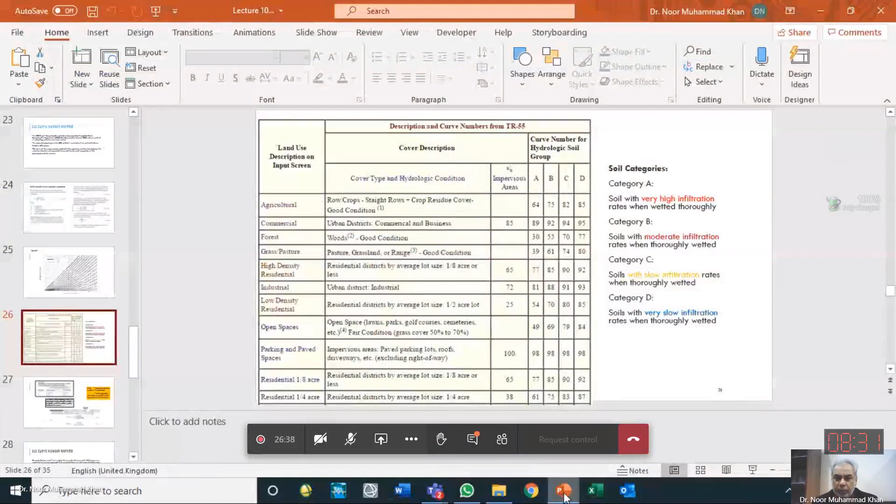So you are seeing that SCS, Soil Conservation Service Department, which is a sub part of US Department of Agriculture, they have given curve numbers, which are a coefficient or a constant, let us say, for different kinds of soil, for different kinds of land uses, and for different kinds of soil types.

For example, for agriculture land use having row crops in it, the curve number they propose varies from 64 to 85 for different soil groups A, B, C, D. So 4 kinds of soil groups they have specified, and they have divided the soil based upon their infiltration capacity.

If you read the definition of the soil categories, category A is the one which has very high infiltration rate, B has moderate infiltration rate, C has slow infiltration rate, and D has very slow infiltration. So they have divided into these four characteristics. If the soil has a very high infiltration rate, then the curve number proposed is 64.

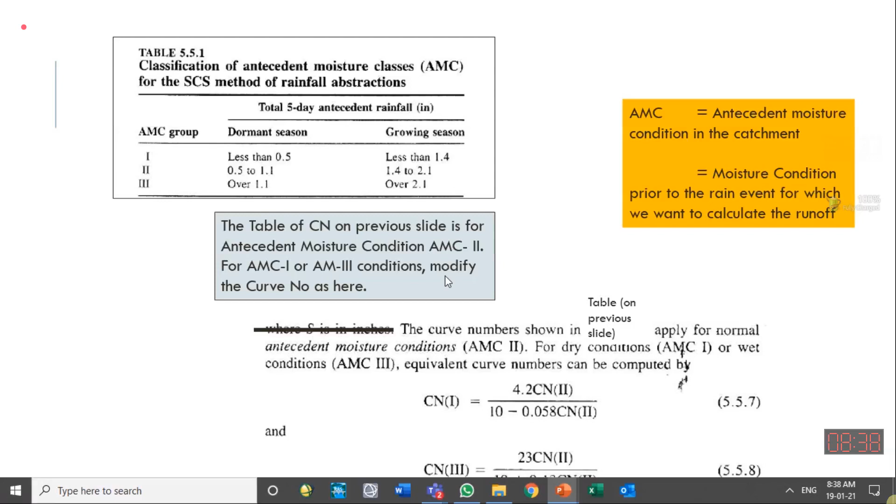That should be taken into account. So if curve number is known to us, this SCS method has given us the relationship between runoff and precipitation and infiltration rate.

IA is initial abstraction, or initial losses. Abstraction means taking out something. We use this word quite often in hydrology. We say groundwater abstraction is so much in Pakistan, meaning groundwater extraction is so much. Abstraction and extraction are similar things. So over here, abstraction means that water which is taken out of the precipitation, and the rest is the runoff. So it means the initial losses which are there.

S is the potential maximum retention in the catchment, the total retention possible in the catchment to fill all the depressions and account for infiltration. That is called S. P is the precipitation for which we want to find the runoff. So they have related runoff, in units of depth of water (inches), equal to P minus IA, initial abstraction, squared, divided by P minus IA plus S.

This initial abstraction, they found from different experiments, can be taken as 20% of the total or maximum retention. So IA can be replaced as 0.2S, and the same equation can be rewritten only in terms of P and S: Q is equal to P minus 0.2S, squared, divided by P plus 0.8S.

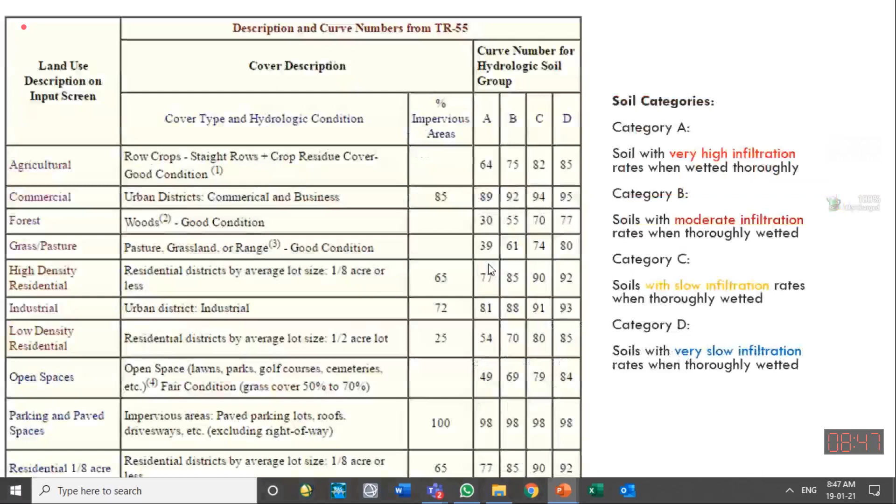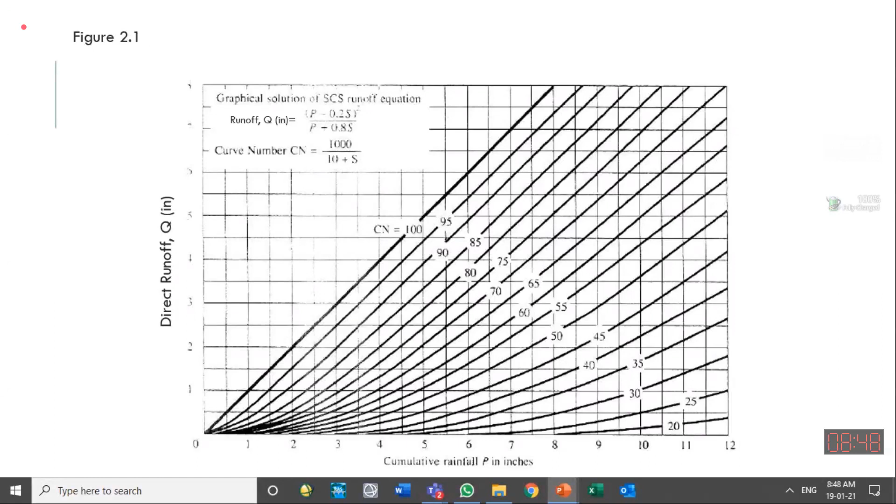So if somebody wants to know the losses, he can find it from this method. If somebody wants to know the runoff, he can estimate it from this method. Hopefully you will be able to use it in a good way. So either you use a graph or you use the equation - you should be knowing both of them. Sometimes we give the graphs to you. Equations are simple.

Q is equal to (P minus 0.2S) squared over (P plus 0.8S). And we know the original equation was relating the initial abstraction and the total retention with the runoff. Initial abstraction was taken as 20% of the storage of the maximum retention, and the curve number and maximum retention are related by 1000 over curve number, minus 10.

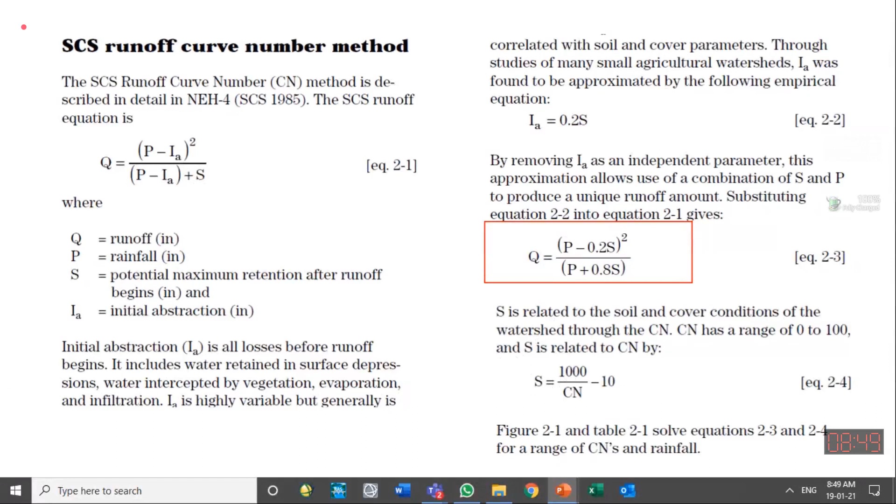So these equations are for inch units - keep in mind, these are for the inch unit. In other literature and books which work in SI, in centimeters, if they are measuring, you will find a slightly different coefficient over there. So this method is available in different places in centimeters and different places in inches. So take care that these equations are good in inches. Any question in this method? This is widely used - people have used it in GIS also.

They give the land type, the file for the land type, land cover, and soil type. Using these three pieces of information, they find the curve number automatically from the computer, because the table is also fed to the computer. So if the curve number is known, the rest is calculation - calculate S, calculate runoff for different kinds of rainfall.

Methods are available which can use this SCS method - Hydrologic Modeling System, HMS. HEC-HMS software has computerized this SCS curve number method to convert rainfall into runoff.

Another method is unit hydrograph. We should know the definition of unit hydrograph and also know how to use it to measure the direct runoff. Unit hydrograph is a direct runoff hydrograph. A hydrograph is a relationship between some flow parameter with time. So if the flow parameter is only the direct runoff, then we say this is a direct runoff hydrograph, so unit hydrograph is a kind of DRO hydrograph, direct runoff hydrograph.

It is not a total hydrograph. It is not a total runoff hydrograph. So unit hydrograph is a DRO hydrograph, direct runoff hydrograph, which results due to unit effective precipitation.

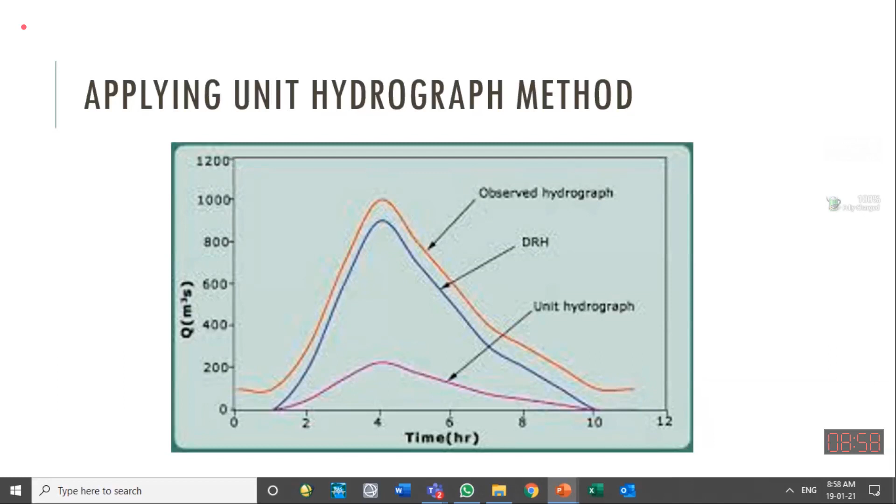If this unit hydrograph is for a storm of, let's say, 1 hour duration, keep in mind that the rainfall event can be of a different time period than the runoff generation. Usually it happens that 1 inch of rain for 1 hour may generate runoff for 6 hours, 12 hours, or some other duration. We call this the base period, the time period in which the runoff is occurring. So base period of the hydrograph is different from storm duration. This is the message: storm duration can be different from the base period of the runoff hydrograph.

If we have the unit hydrograph available for a certain catchment, which represents the behavior of that catchment, we can convert it into the direct runoff hydrograph for any other value of effective precipitation. For effective precipitation of 1 inch, the direct runoff is the unit hydrograph itself. For any other value of effective precipitation, the time distribution of direct runoff can be obtained by using the ordinates of the unit hydrograph, multiplied by the effective rainfall for which we want to find the direct runoff.

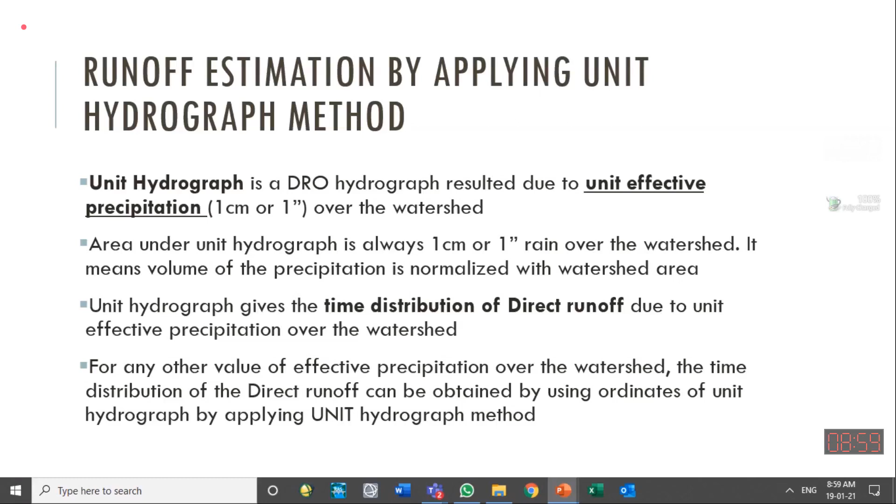Here is the definition of effective precipitation, or excess precipitation: total precipitation minus the losses such as evaporation, infiltration, and transpiration. Now, how to estimate the direct runoff for an effective precipitation of X inches: the discharge because of X inches of effective precipitation equals X inches of effective precipitation multiplied by the ordinate of the unit hydrograph. That's a simple relationship.

I will talk about time of concentration in the next lecture. Simply, it is the time required by a drop of water to reach the outlet from the farthest location of the watershed. If we have a watershed area and an outlet, the time taken by a drop of rainfall at the farthest point in that catchment to reach the outlet is called the time of concentration.

When the storm duration is equal to the time of concentration, we get the maximum flood possible in that area. So storm duration is selected by the hydrologist for carrying out hydrological studies. He should select the storm duration based upon the time of concentration of that catchment. So carefully consider these things.

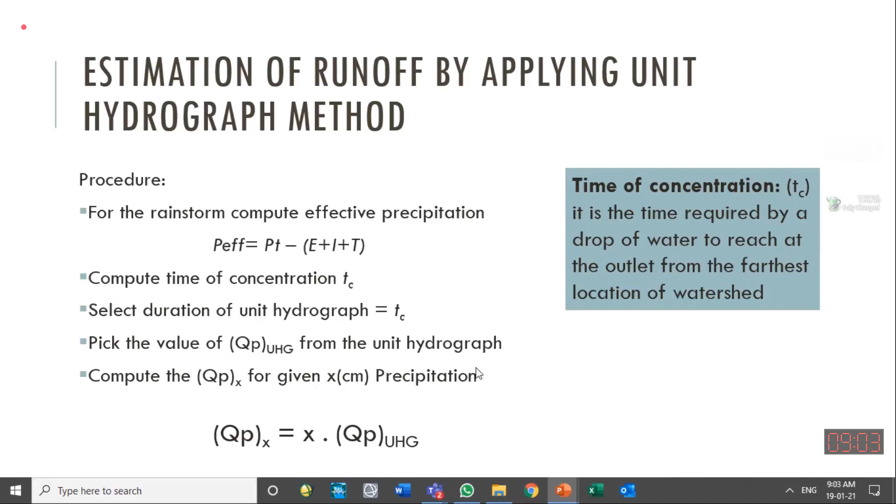So that is one method. In this we assume that the rainfall is uniform over the whole catchment. This method is applicable for the rainfall event which is covering the whole catchment. We are not using it here. Intensity of the rainfall is assumed to be uniformly distributed over the whole catchment. If it is not, divide the catchment into smaller parts, find the unit hydrograph for that part, and use that one.

It is good for catchments less than 500 kilometers square. So caution should be used, because for larger catchments the unit hydrograph has a different shape. We usually don't cover the whole large catchment with one rainfall event. A larger catchment like the Indus Basin, with the outlet at the ocean, normally it is not possible that the whole Indus Basin is covered with one rainfall event. So this method is good for smaller catchments, and it is applicable for tropical watersheds, those areas located in tropical regions. So that is the unit hydrograph.

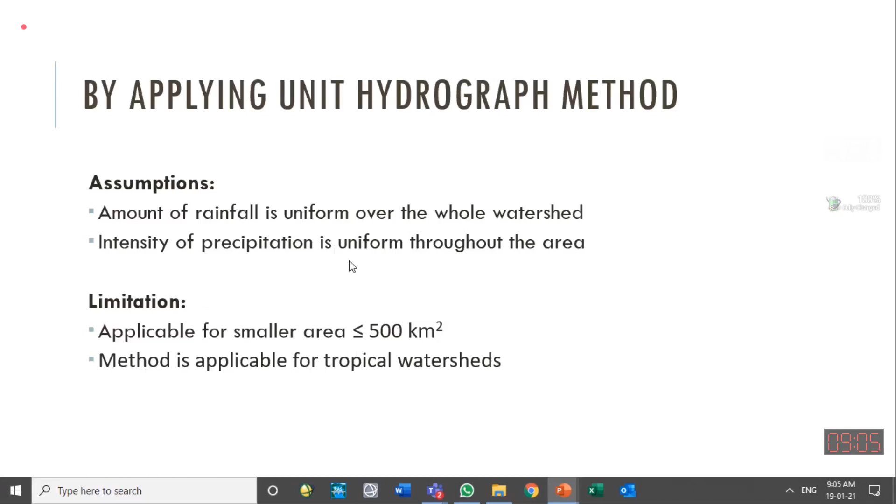So we have studied empirical methods: Inglis, Khosla, and Lacey method. We have studied a little bit more conceptual or physical-based methods, where some parameters depend on the physical characteristics of the catchment. So we are moving towards more physical methods. That is the SCS curve number method. Another method is the rational method, which also takes into account the characteristics of the catchment in the form of the runoff coefficient C. There is a simple equation which helps us find the peak discharge and the total runoff.

Both can be found using this formula, depending upon the coefficient we have selected and the rainfall we have selected. If we select the rain which is the maximum possible rain in that place, this formula will give the peak discharge. If we select the average rainfall, we will get the normal or average discharge in that region. So CIA: three parameters. C is the coefficient which takes care of the catchment characteristics. I is the rainfall for which we want to find the runoff.

A is the area of the watershed. CIA is used to calculate the peak discharge, or the direct runoff, from a catchment. These values vary, and the coefficients I and A have particular units. In some books, I should be in inches, and area should be in hectares or acres.

So we have to take care of the literature we are using to select the C value, the coefficient value of the catchment. That will tell what should be the unit of I and what should be the unit of A. This is an empirical equation, and they have found that a particular kind of catchment should have a C value of so much, then runoff can be calculated.

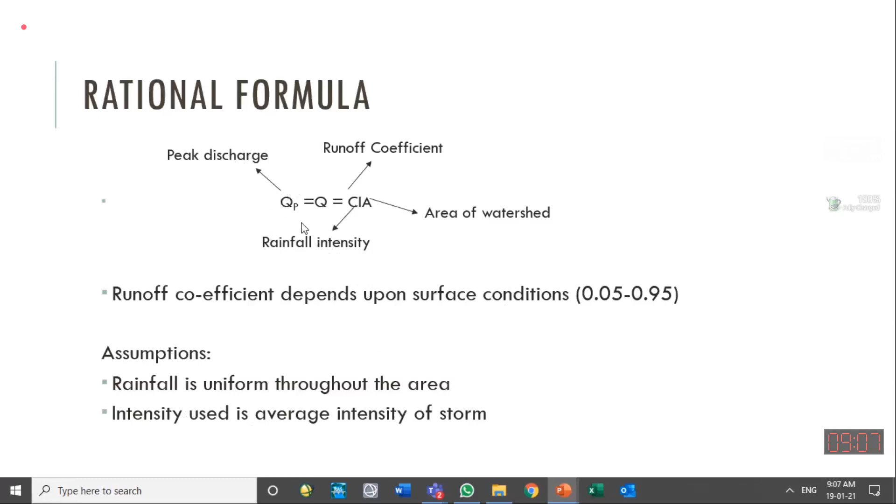So rainfall is assumed uniform throughout the area. The intensity used is the average intensity of the storm, so we get the average flow in that area. If the intensity used is the maximum precipitation, we get the flood value instead, the peak flood value. So these are some of the methods of runoff estimation.

We're seeing what a hydrograph is, how we can separate the hydrograph, and how we can make the unit hydrograph. These things have been covered in the lab also, so we will go through them quickly.

Last time I taught you that groundwater does change. Here is the actual observed groundwater variation in UET. In December of 2019, the water level under the ground was 244.5 meters, with respect to mean sea level. It reduced to as low as 243 meters, and then in the middle of 2020, in July, it increased to 245 meters. That is the variation of groundwater we observe in this place because of water abstraction and because of recharge from the rainfall.

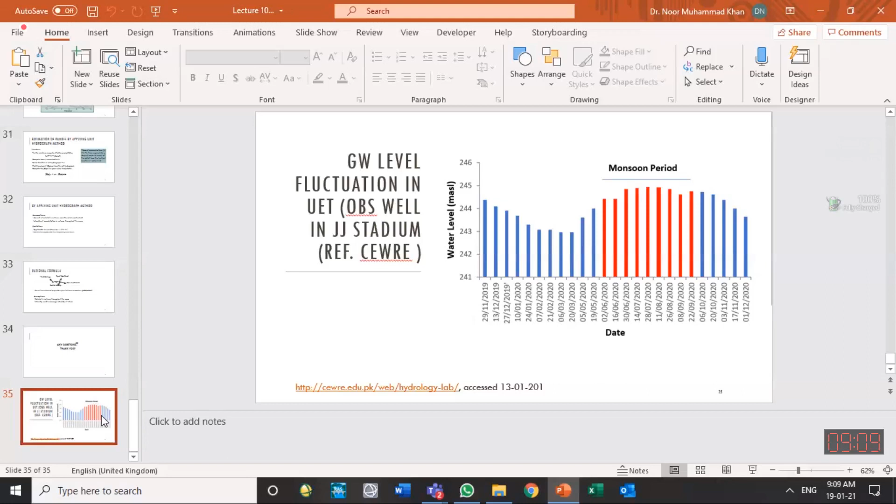So I'll stop here. If you have any question, you are welcome.

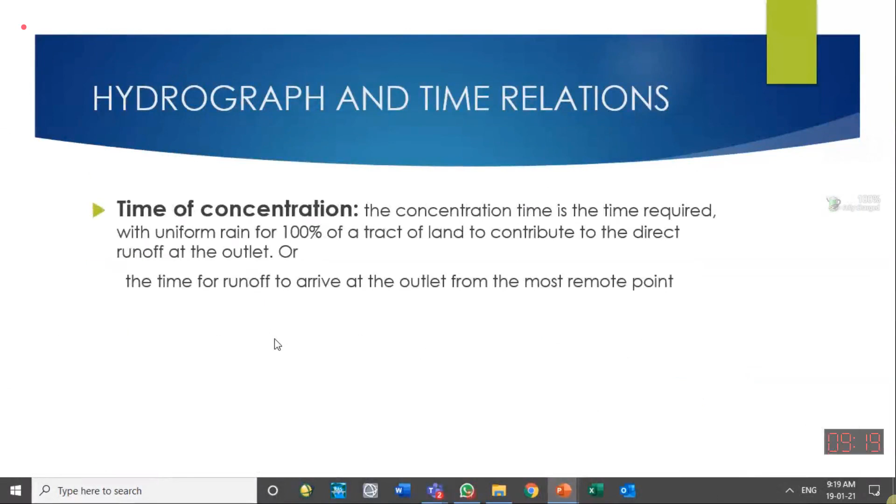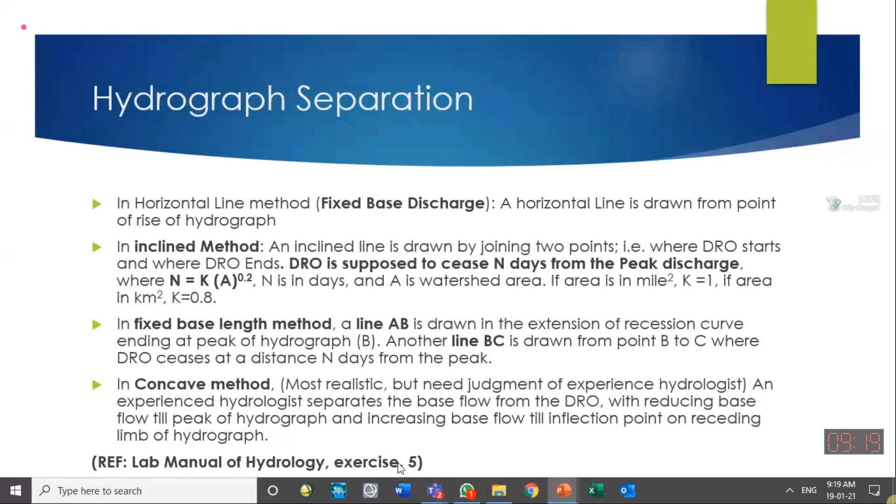Then separation of the hydrograph using the straight line method, the base length method, and the concave method, which you have covered in exercise 5 also. So that's what I am talking about, that you have gone through it in the lab.

Then, how to make a unit hydrograph. The definition of the unit hydrograph is placed here again with reference to USGS. So definition and how to make and how to use it, both things we should know. As a hydrologist, we should be able to make a unit hydrograph.

For making a unit hydrograph, what do you need? You need the actual hydrograph of that catchment. It means you should have a stream gauging station for that catchment, which will give you the flow quantity at different time intervals after the rainfall.

Using those observed flows, we can make a total hydrograph. From the total hydrograph, we subtract the base flow, and the remaining will be the direct runoff. If that direct runoff is for an effective rain of more than 1 inch, we adjust the ordinate of the direct runoff so that the area under the graph equals 1 inch of the effective rainfall.

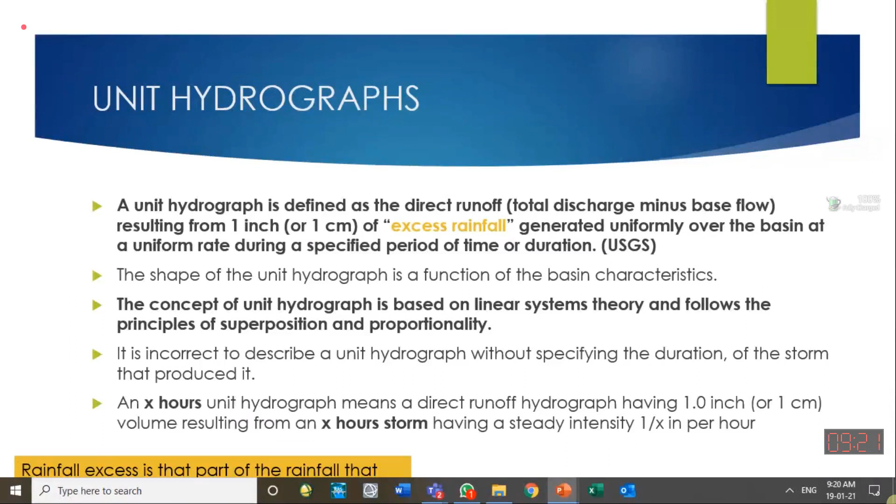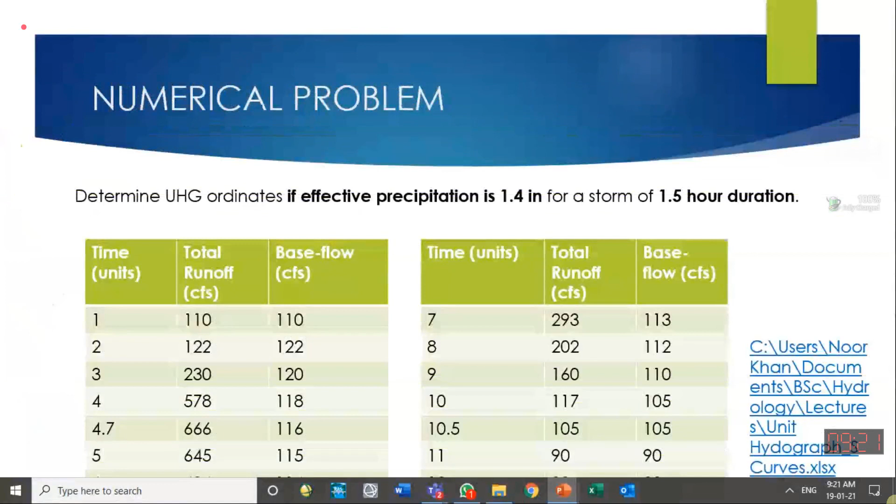So adjustment is the third step. So how to make a unit hydrograph, and how to convert a unit hydrograph into a unit hydrograph of a different duration - we call that conversion of the unit hydrographs.

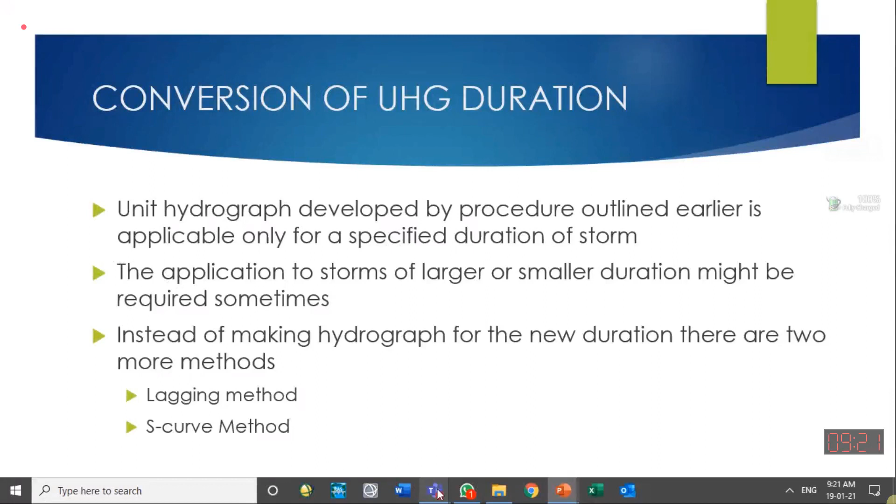So let us move towards what is a hydrograph. I think you should tell me what is a hydrograph.

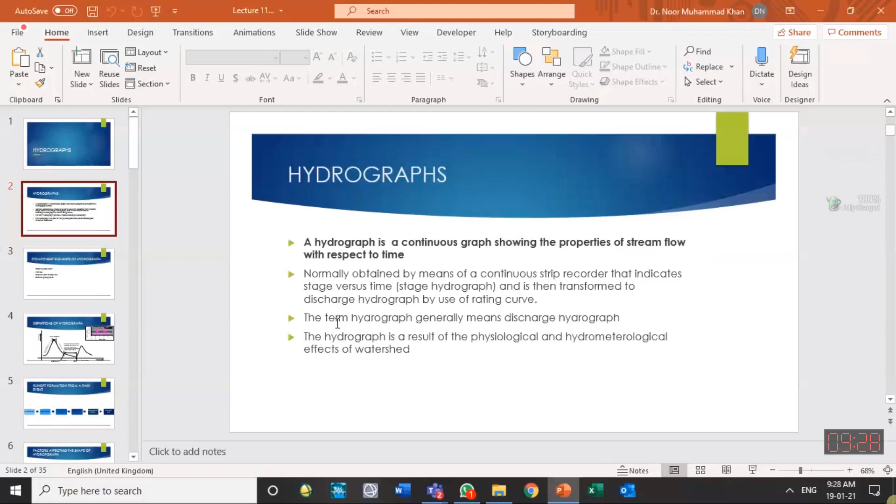And if we have a stage hydrograph and if we have a rating curve - who will tell me what a rating curve is? Quickly, what is a rating curve?

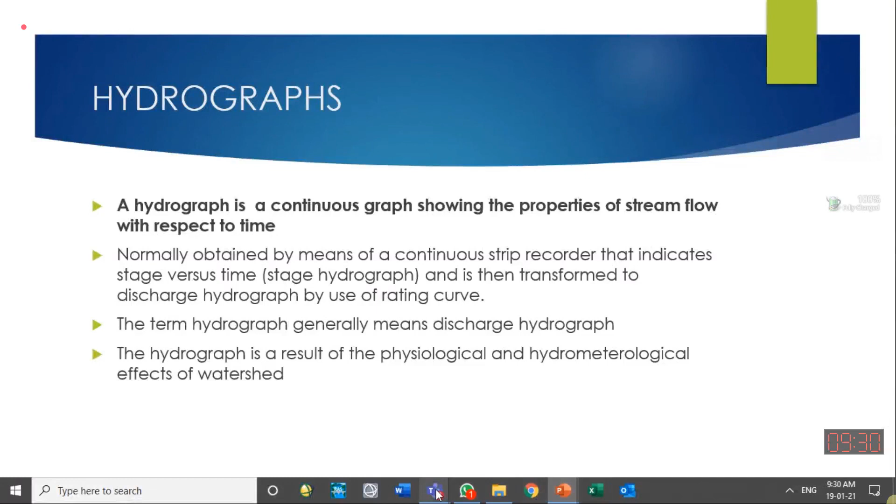Thank you, Hassan, you are absolutely right. Soil type, slope, what else? Cover on the land, roughness, infiltration, all these affect it. These are the physical parameters which affect the flow.

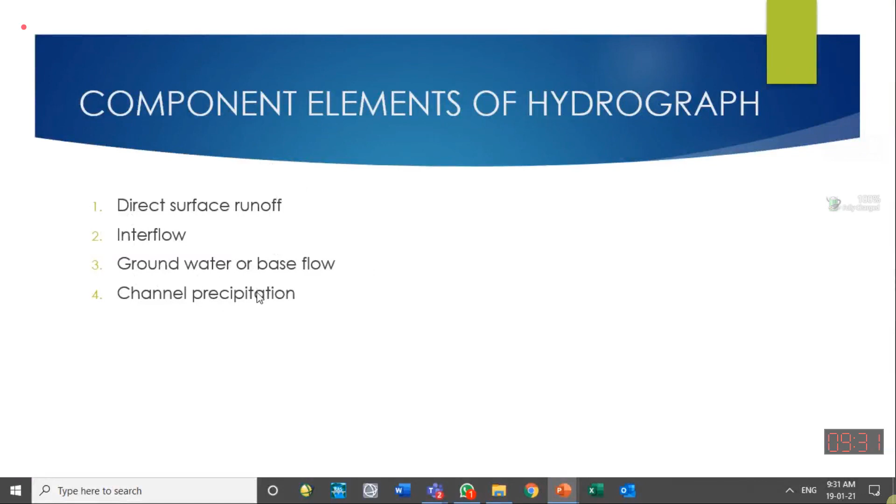So the runoff, the hydrograph, contains within it direct surface runoff, which we have talked about, interflow, groundwater, and the precipitation on the channel. So all these make up the total hydrograph.

But for ephemeral and intermittent streams, it can go as low as zero flow. And for streams near coastal areas, it can go to the negative side also. Do you understand? Normally, in a stream in Punjab, in Khyber Pakhtunkhwa, you cannot expect a negative flow, meaning flow going upward, upstream side. Is it possible? It is possible near coastal areas, depending upon sea level waves - sometimes we have a backflow also.

So that is possible, but not in a normal watershed, only in coastal areas. Those cities located near Karachi, if they are studying some creek like Korangi Creek or Lyari Creek, they can expect water in both phases. So their hydrograph may go above zero discharge or below zero discharge - positive showing discharge in the downstream direction, negative showing discharge in the upward direction.

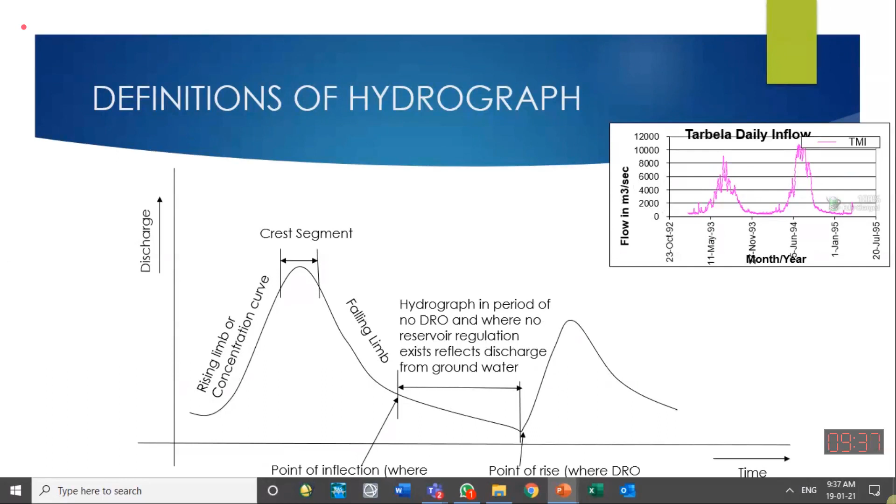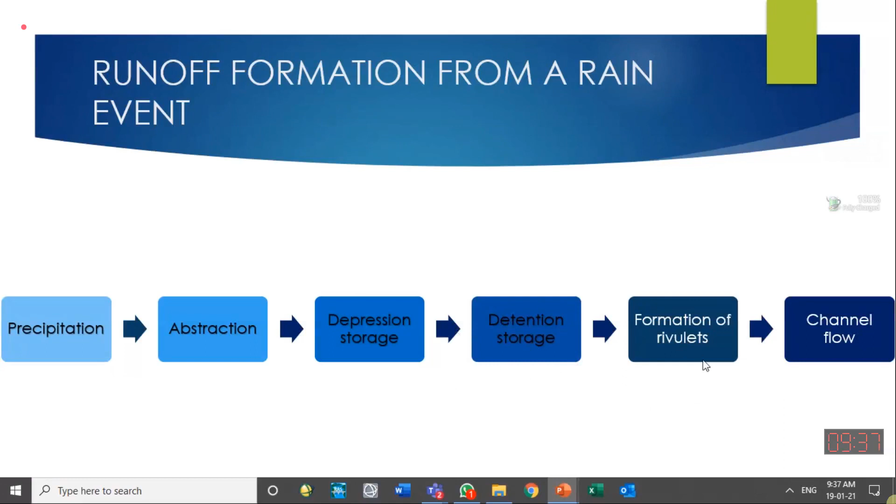If I want to convert that inches into cubic meter per second, I can do it as I told you earlier. So this is the process which happens, which generates a channel flow: precipitation, then some abstraction or losses, and those abstractions are depression storage, detention storage, and then excess water starts flowing over the land, and then water reaches the channel flow. So that we have covered in the previous lecture also.

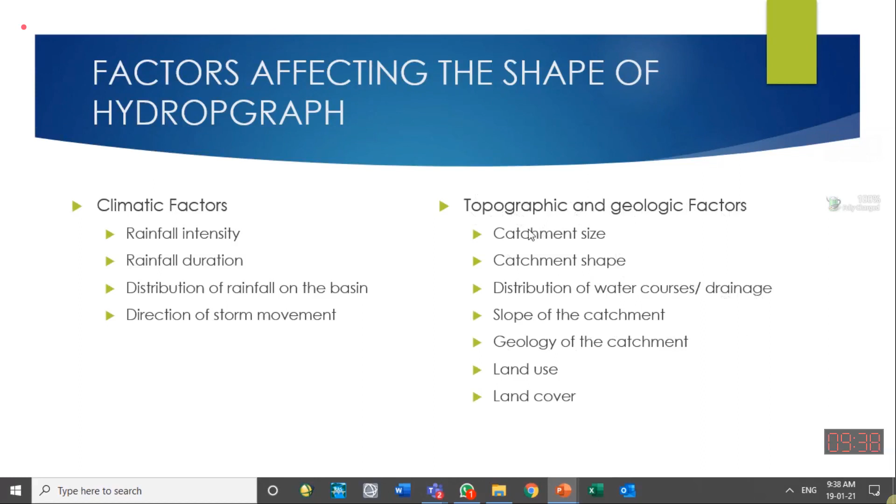Factors which affect the hydrograph shape can be categorized into two types. One is the climatic factors related to the rainfall types and the rainfall event. The other is the physiological or physical characteristics of the catchment, which we call topography and the geological factor. You can call them the physical factors of the catchment. So one by one, we can discuss them in these slides.

If we first focus on the climate and precipitation factor, the type of storm does affect the hydrograph. It means whether the storm persists for a longer time or it is a short duration storm with huge rainfall in it. Thunderstorms are usually called short duration intense storms, containing intense rainfall activity but for a shorter duration. So for a smaller basin or smaller watershed, the peak flow, the highest flow of a catchment, will be generated because of a thunderstorm. So thunderstorms usually produce peak flow in smaller basins.

While for a larger basin, because a thunderstorm is a small duration activity, for a larger basin like Indus Basin or Mangla Basin or Tarbela Basin, usually we need a longer duration rainfall, which occurs when there are cyclonic storms. We have told you about a cold front and a warm front.

I hope while we were studying the rainfall or precipitation chapter, if we have a cold front and we have a warm front, these are the air parcels. If it is because of the cyclonic phenomena, then we usually have persistent and longer rainfall activities, and they produce flood activities. Peak discharges are produced in larger basins because of these kinds of rainfall activities.

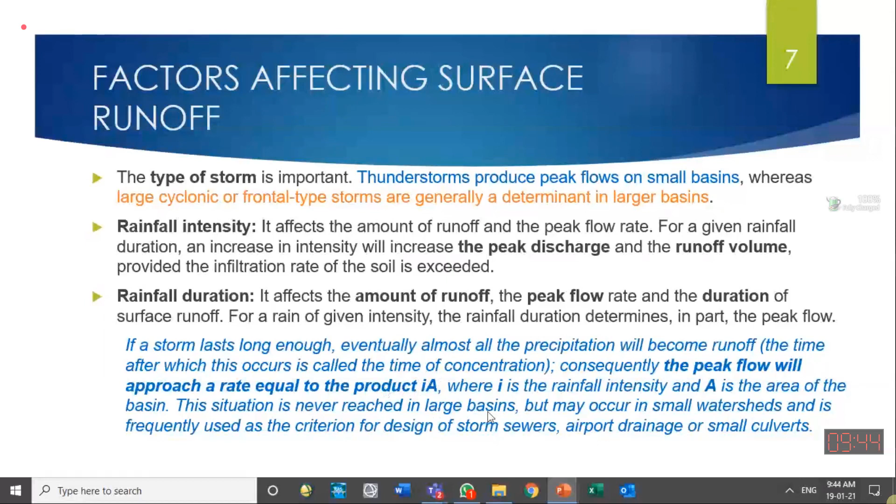So all the losses have already been filled, all the infiltration has been filled, depression storage has been filled. Now whatever rain is coming on the watershed is reaching the outlet. So that is a theoretical possibility for a larger basin, but for a smaller basin it can be achieved. That is what is mentioned over here.

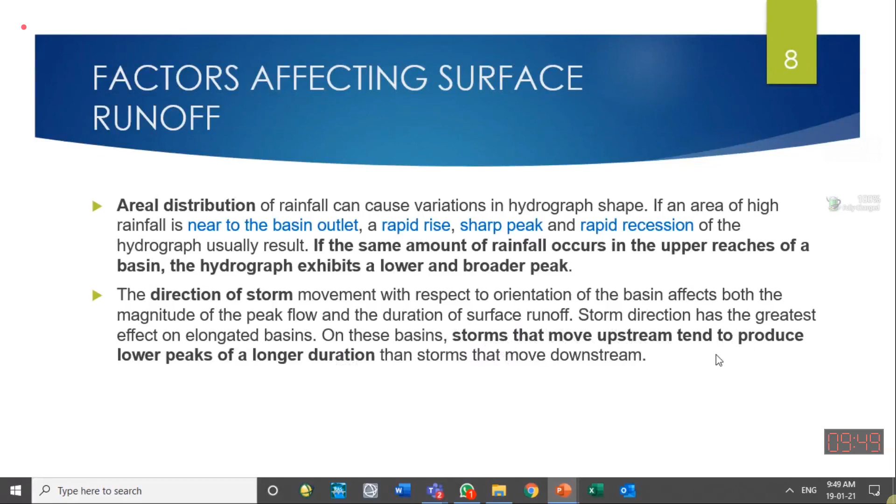Next is the effect of the direction of the storm, shown here. If the storm is moving away from the outlet, moving upstream, it tends to produce lower peaks of longer duration.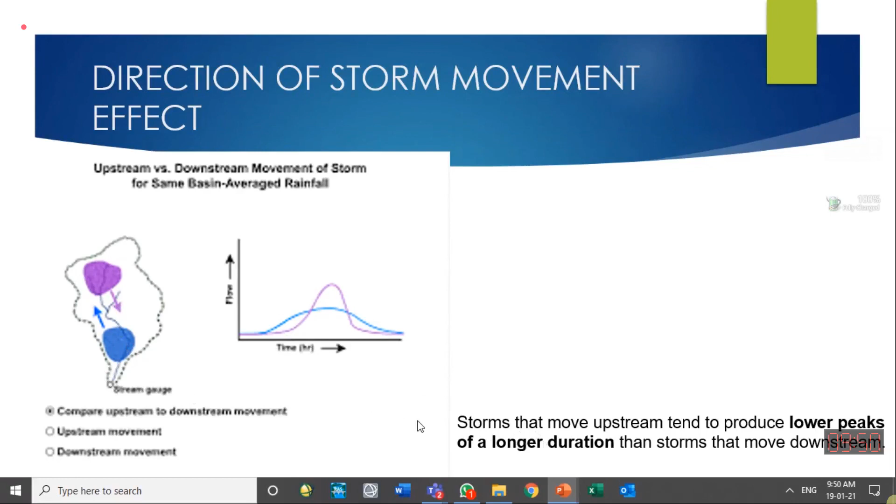So that is how the movement of the storm affects the runoff. Here we look at the effect of the drainage area, the effect of the shape of the area, and the effect of streams — how well developed the streams in the channel are.

If it is a smaller area, the overall volume generated for the same rainfall will be less. But if it is a smaller area, it is possible that more intense rainfall occurs on it.

Drainage area also has an effect on the time base of the hydrograph — it is lengthened. The higher the drainage area, the bigger the basin, the more the base of the hydrograph. So the time base of the hydrograph will increase.

Why does the peak flow per unit area reduce with catchment size? That is the effect of size. Carefully note these words: peak flow per unit area — not simply peak flow, but peak flow divided by the area. Peak flow per unit area increases if the catchment is small and reduces if the catchment size is large. So as the catchment area increases, peak flow per unit area will be reducing.

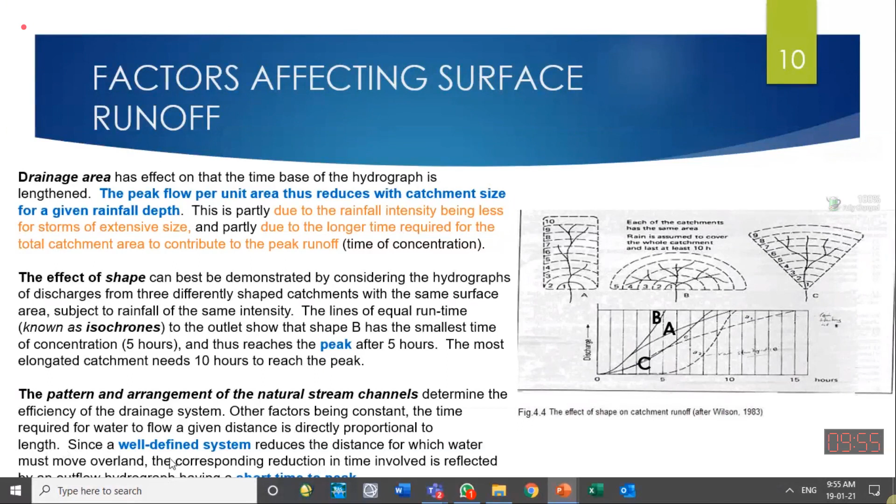Steeper slope reduces the time of concentration, so a quick peak will be generated. Also, steeper slope doesn't let infiltration occur because water cannot stand over there, so infiltration will be less, more volume will be generated, and we will be having a larger volume under the hydrograph.

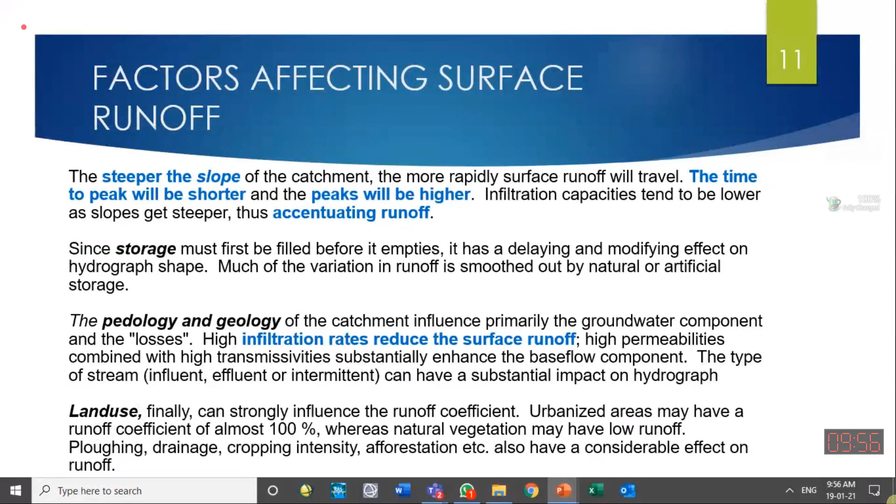Similarly, the geology or pedology of the catchment controls the infiltration rate. Geology controls whether it is sandy, rocky, or silty, and that controls the infiltration rate, the volume of water, and the runoff. Land use also changes this—whether it is agriculture or urban area—and that controls the runoff too.

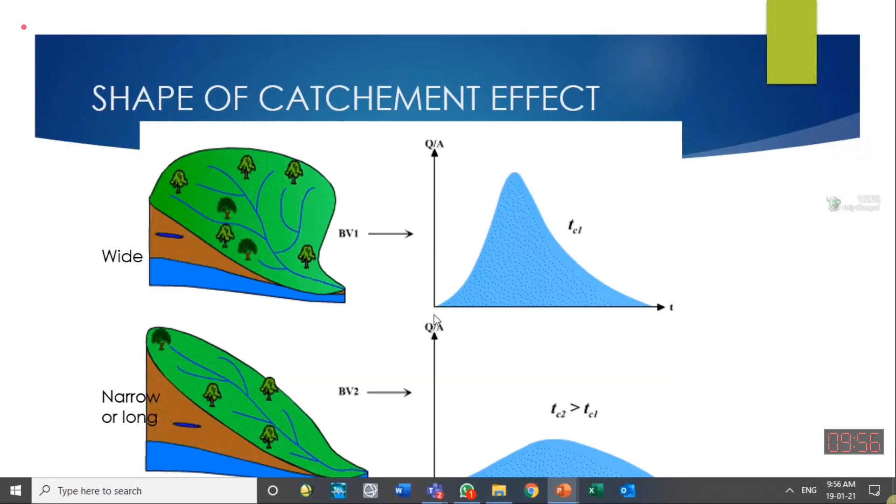We understand this. Here the shape effect is shown. For a narrow catchment, we will be getting the peak later, and the peak will be smaller as compared to a wider catchment having a small time of concentration, higher peaks, and earlier peaks. Shape of the catchment is shown over here. If the shape is wider close to the outlet, we will be having higher peaks. If the shape is narrow, this is the normal catchment, and we will be getting peaks later compared to this one.

And if we have a dumbbell shape of the catchment, we can have two peaks. First, this part will be generating a peak, and then when the effect of this dumbbell area, the reduced width area, is there, flow will be reduced over here. When the effect of the upper part reaches the outlet, another peak will be generated.

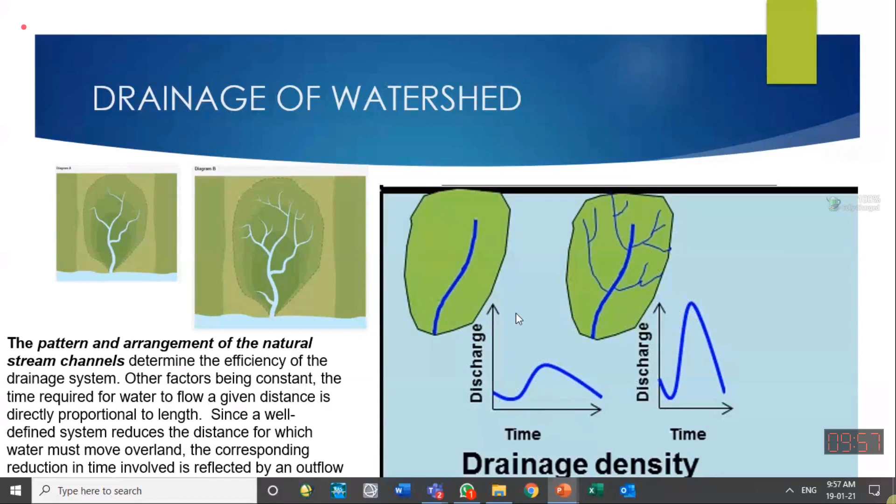So land cover effect: if it is a forest, it will be stopping the water, generating less flow, so runoff will be less. If it was barren, without any forestry, open land, there would be less infiltration and less depression storage, so more flow will be generated. This is one cause of flooding in urban areas—catchments that are being urbanized, where vegetation is being removed, experience more floods.

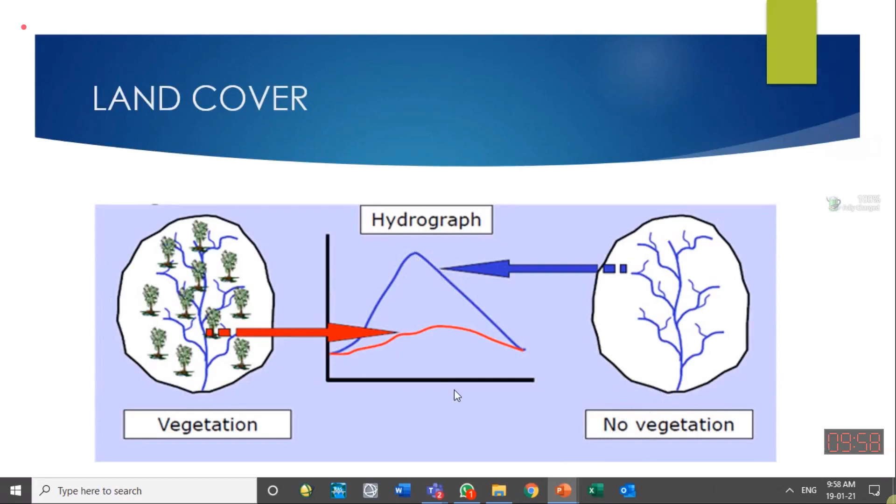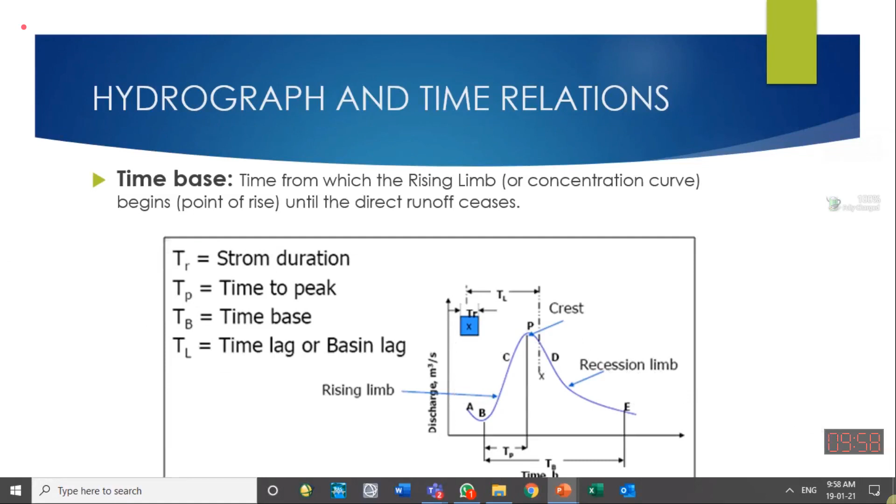So I stop it over here. We will continue from here with the different parts of the hydrograph and how to divide them, how to separate the hydrograph, and how to make a unit hydrograph. Any questions?